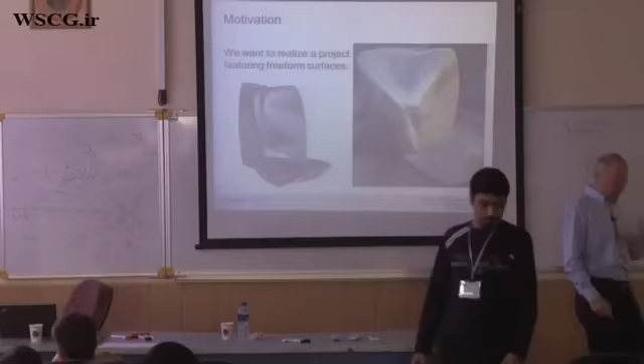So paneling, this is what the problem is. Given is a design surface, even a very complicated one maybe, and we would like to break it up into panels and see whether we can use as simple as possible panels while still not deviating far from the original design intent.

So this is a problem which is not completely solved. The solution which I tell you today is probably still the state of the art. Also, it was done in 2010, so it's a bit old.

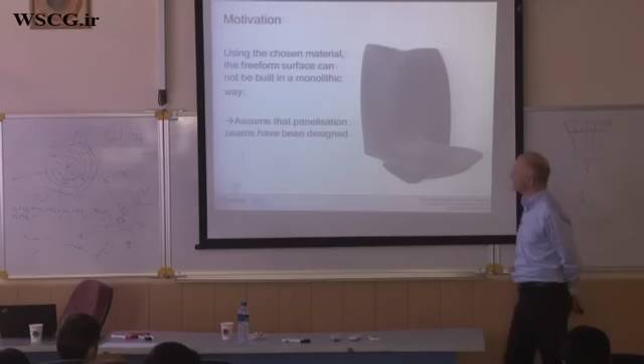What we did at that time: you do a layout of these panel seams by any software you like. So this is, for example, you can put some quad mesh. Here we assume this is the case, and there is software which pulls out such quad meshes. Of course, the quads will not be planar originally. It will be very hard to make them planar, maybe.

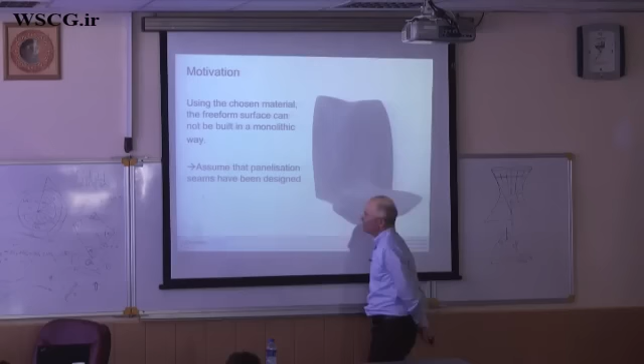And moreover, as you have seen in this project on the Eiffel Tower, the architects sometimes don't like only flat panels. Also, this is a mathematically interesting thing. It may look too faceted, so you will have to go to other panels as well.

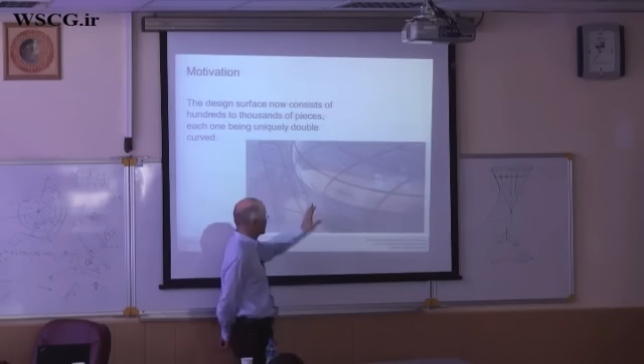So we assume here that we have a design surface and the panelization seams, so these panels are more or less determined, predetermined. But of course we must allow some deviation so that the entire thing can be built at a reasonable cost. Because if we just take the seams and the surface patches of the design surface, then it will be impossible to afford the building, simply because the manufacturing of such a panel may be too expensive.

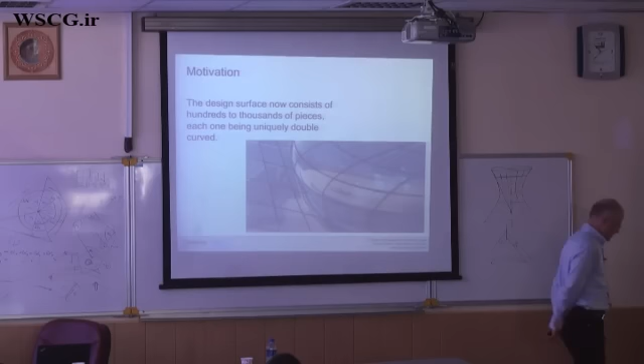In general, it will be, as we say, double curved, so not developable and curved in both directions, both principal curvatures not zero. This will, in most cases, require making a mold, and making a mold is typically more expensive than the actual production of the panel using this mold.

So this is out of the game somehow, you cannot do it. So what can we do? Now, the main idea of the solution is the following: I give several types of panels.

The cheapest are, of course, the planes. Then we prescribe other panels that are maybe cheap to produce, for example a cylinder. Remember, I told you for glass, a cylinder is still a reasonable shape. There are machines to produce curved glass in the shape of a cylinder.

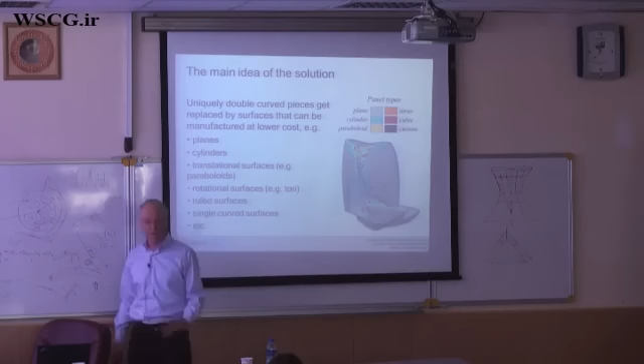Then we have a paraboloid. A paraboloid usually has congruent profiles on it, so it's a little simpler maybe to build a mold. And a hyperbolic paraboloid is even ruled.

I think it depends on the type of material you are going to use, which panel types one will actually put into the system. The system itself, the algorithm, could work with various types of panels.

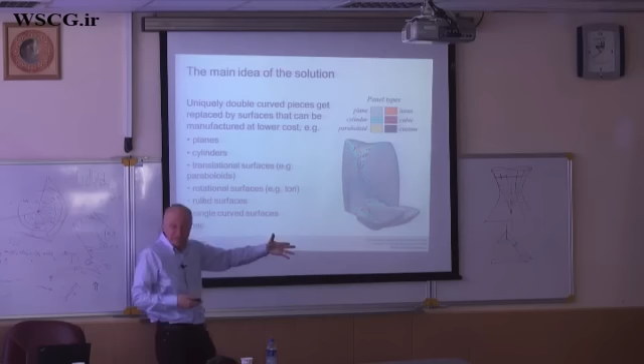So here I have the following types: plane, and you see on this design surface, in these relatively flat areas, you get a lot of flat panels. Then there are some cylindrical panels, and you see here in these more feature-like areas, you have these cylindrical panels. Feature, I mean areas where you have in one direction close to zero principal curvature, in the other direction higher principal curvature, and it's natural to use cylinders here.

And then you have some nasty cases, and the most nasty case is actually the cubic. The cubic just means you have like a cubic Bezier patch or so, a more complicated patch which definitely would require making a mold. But if these cubic patches are rare, it is still feasible.

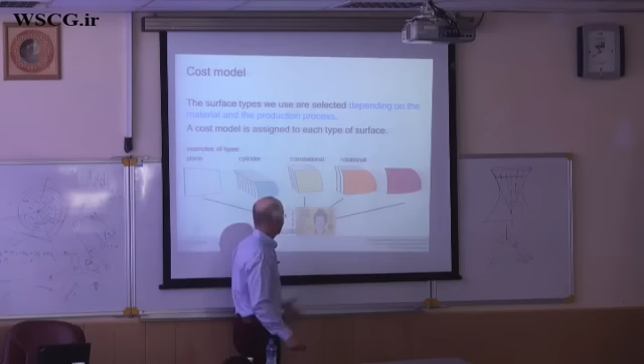Example types, as I said: the plane, the cylinder, maybe translational, rotational, depends. And of course, a cost is always attached to each panel. So this can go into the system.

And now one can do the following: one can come up with an algorithm. This has been published at SIGGRAPH 2010, and the lead author is Michael Eigensatz. Maybe I write this down. Eigensatz. This was published at SIGGRAPH, with other authors including myself and others.

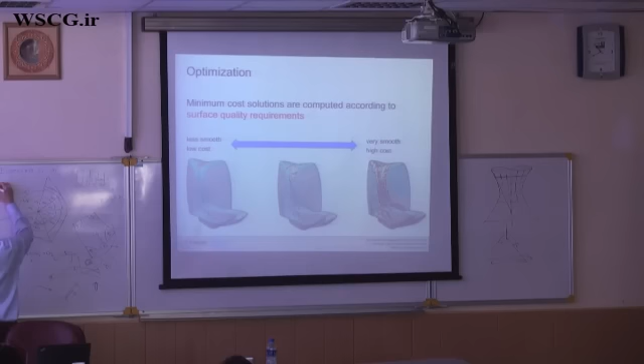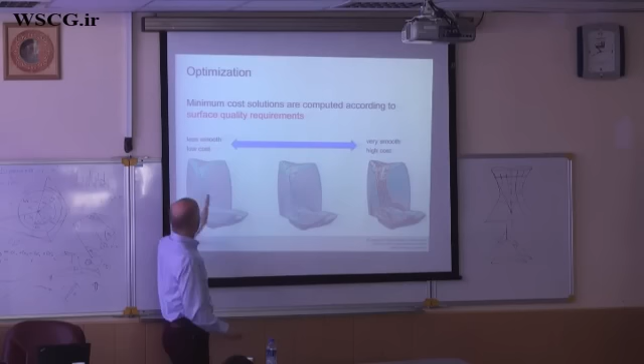SIGGRAPH 2010. And there we have an optimization, an algorithm that allows you to switch between a less smooth realization, say with stronger kink angles but a low cost, and a very smooth one, which has of course higher cost. It is clear that the higher quality has higher cost, so this is obvious.

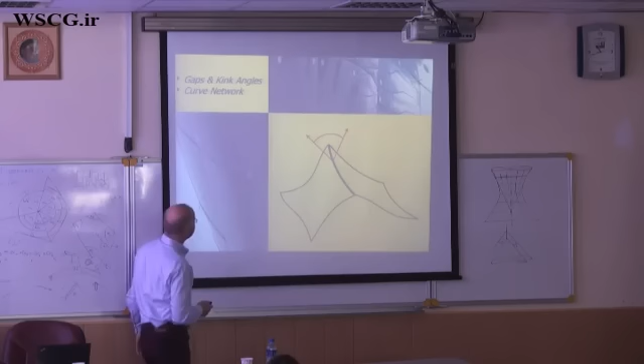Gaps and kink angles. Gap means the offset along the edges where they should join, and kink means the deviation in the surface normals. Here, this is the kink, and the gap would be here between these two patches.

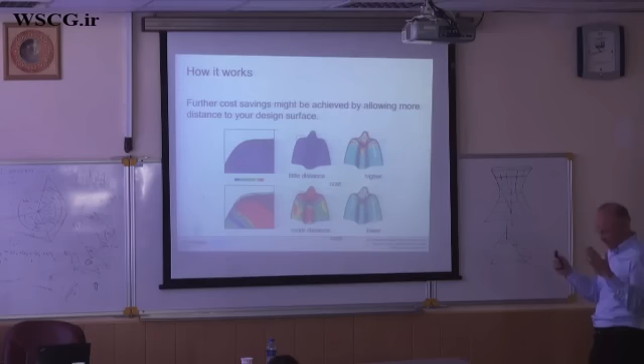Now, we even included the following: it may be beneficial if one can deviate a bit from the design surface. So we will not necessarily stick with the given design surface, we would allow some deviation. You may have a tolerance, say 30 centimeters, for a large building may not be much, but still it may help you quite a bit. And then, this is more interesting, we were thinking here about mold reuse.

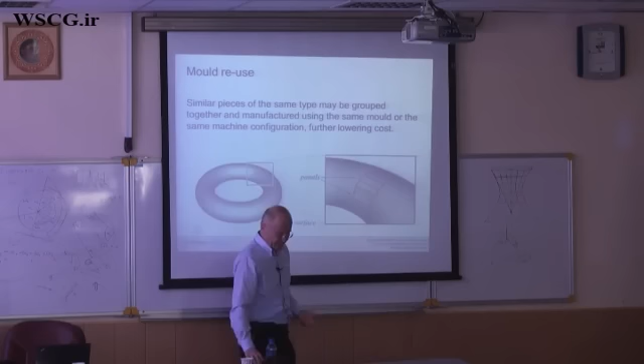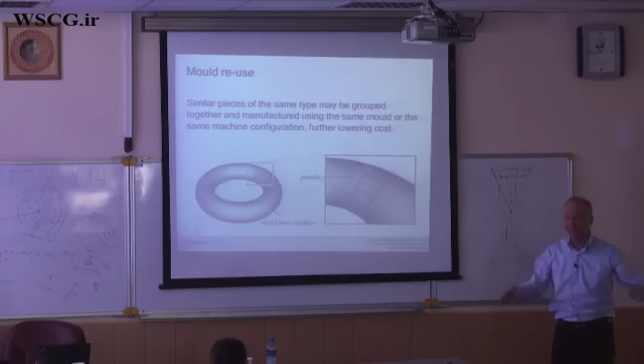This means the following: I have a mold, let's assume I have to produce a torus patch, a rotational torus patch, and I produce a mold to manufacture this patch. I may produce different patches with the same mold, just putting some material in a different way onto the mold, like glass—you heat it up, put it onto the mold—or cut the boundary out in a different way, like here. So with the same mold you may reuse it for different panels, and this mold reuse was incorporated in this optimization.

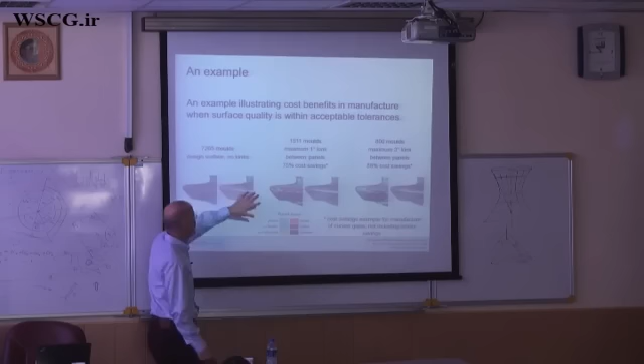And here we have 1,311 molds and a 1 degree kink. At 2 degree kink, you go down to 400 molds, and so on. So here you already have 88% cost saving compared to here. So it's infeasible, and the more kinks you allow, the more feasible it gets.

I will probably not tell you the details of this algorithm, because this is an entire lecture in itself, and then I cannot talk about the other optimization.

Please note... what did I want to say? I forgot it. See, I start to become really tired.

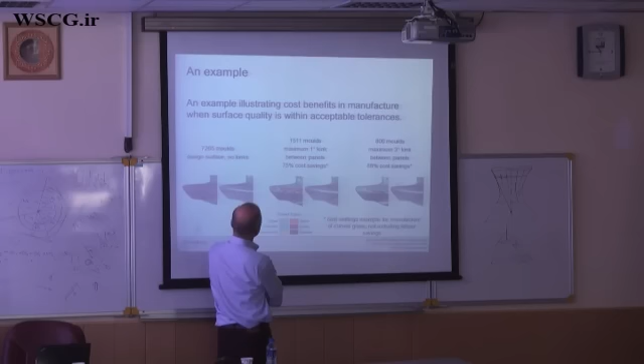Anyway, let us look at the result. So we have the original CAD model, we have this panelization by an architect, and then—this is what I wanted to say—it's global. It is not enough to do it locally; you have these seams which roughly define the location of a patch. Then I could do, say, the best approximation by a cylinder, because I like a cylindrical patch. But this is not what we are doing—we put it into a global optimization, and the patch type is also unknown.

And this is why it's a nasty problem: we have, say, 5 or 6 patch types, a discrete variable from 1 to 5, and we need to select from this discrete variable. Then we have continuous variables which define the actual location of a plane, the parameters of a cylinder, and so on. So this is an optimization problem which is discrete in some variables and continuous in others, and this is always painful.

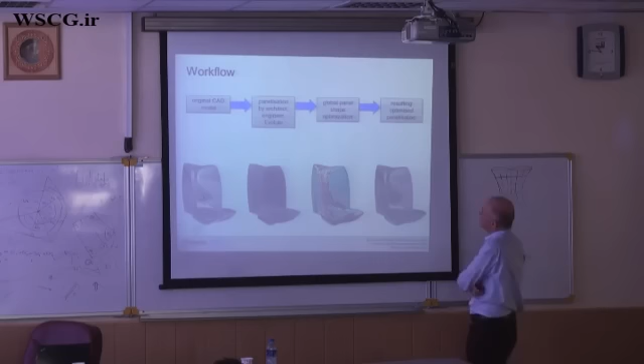So it is, of course, not possible to come up with a precise solution—you can only have some heuristics. One can actually prove that you need heuristics, and we apply certain heuristics in this global shape optimization, and then you have a final result. What I can really demonstrate here are some real projects, but this software is just for demonstrating the effectivity—it has not been applied to these projects to my knowledge.

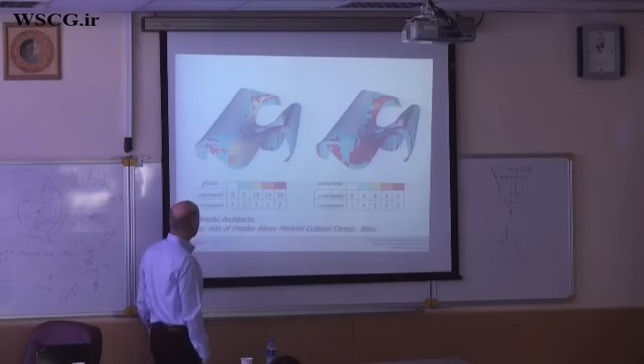If we do this design from glass, we have to assign certain reasonable cost values. So the optimization also takes into account the cost of production, of the mold and of the panel, and overall you would like to come down with the cost, which has to be reasonably estimated. So here, if you build it by glass, you see the values, and from concrete you see other values of cost assignment. Unfortunately I do not see here how much we save, but you can read it in this paper.

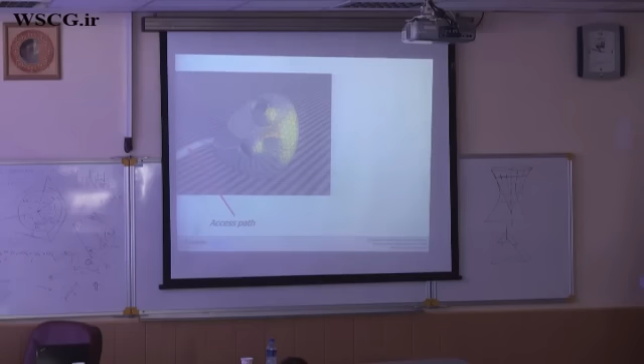This is a figure which is unfortunately not complete here. You can also do the following - this was a follow-up work, and I think it makes sense. If you have a huge building, there will be parts of this skin which you will hardly see from any viewpoint, because either it is very far away, or it is hidden by another building. So you could also take this visibility into account and allow a lower quality in the areas which are hardly visible, and this brings down the cost as well.

So here, this is the building, and people usually go on these parts, and on the other side, which nobody will see or rarely will see, you have much higher kink angles. This shows the kink angles, not the cost. So the quality here is higher because this is more visible, and the quality here is lower. This can also be done in this algorithm.

Now I go to what I really promised for this part of the lecture, namely the optimization. So this is an optimization method which we call guided projection onto constraint variety. Sounds very bad for the architects, but it is not so bad.

Usually one has to ask certain questions when you design something - not only is it nice, but also does it work? Would it stand in architecture? And how to produce it? And of course the architects know this famous guy Antoni Gaudi.

He came up with the idea to first come up with a physical model. Since building a model based on compression is not so easy, he turned it around and said, I design one based on tension. So he had these famous hanging models. And if you take this hanging model around, if it is force balanced with tensile forces in the first place, if I turn it around, it is in force balance with compressive forces after turning it around.

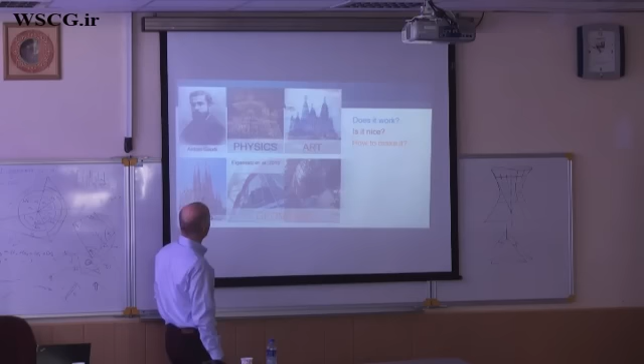So several parts come into play. I would say some small, simple version of physics, some kind of art is involved, and geometry. And what we would really like to do here is computational design, which takes these things into account, namely functionality, aesthetics, and whether we can actually manufacture it.

So this method of guided projection is to access these design spaces. It is called guided because we have to look at various types of aesthetics here. I will only talk maybe about the first part, about this form finding, and yesterday we had already developable surfaces so we don't need that today. Only if I have enough time, I can also show you something about these other types of regularity and patterns on surfaces.

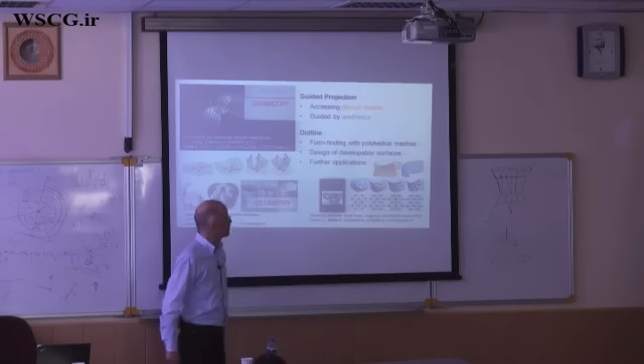I had this transparency already up. We look first, but it's only for motivation, at self-supporting structures. And mathematically, how do we express it? Let me repeat - I had it in my first lecture. A structure is self-supporting if I can put a network of forces inside, a mesh of forces inside the hull. So it must be within these bricks in the previous case.

And along each edge you have acting forces - they have to be compressive. So this is an edge vector, Eij is the vector from vertex Vi to vertex Vj. And this Wij is the force density, so this is the force acting in an edge.

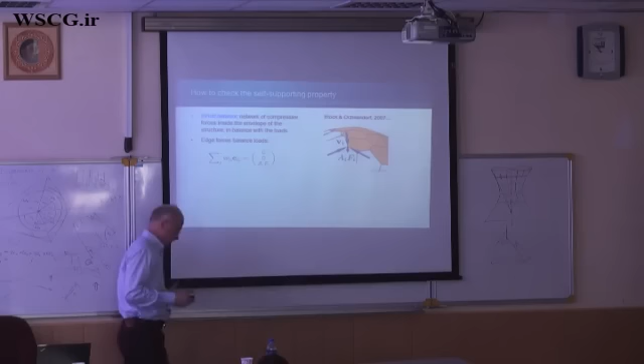And along each vertex Vi, all incoming edges have to balance the weight, which is usually vertical, because we only consider here the self-weight. I'm often asked, so if you only consider the self-weight, what happens if you put a little more weight on the structure? If there is some snowfall in my country or some sandstorm here, something like this.

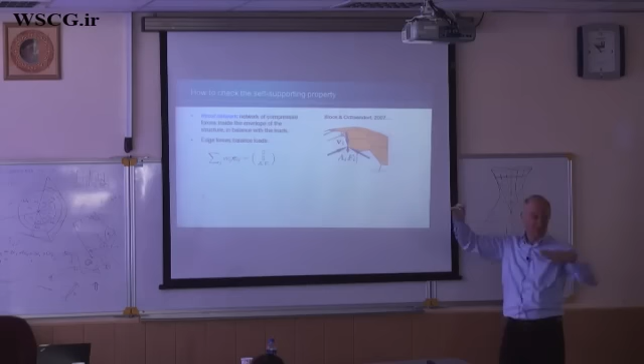What happens? It does not mean that the structure would fall down, because if you have inside your structure such a so-called thrust network, which is in balance with the dominating load, namely the self-weight, you can still put on material and would still find a thrust network that verifies that this structure stands, but up to a certain limit.

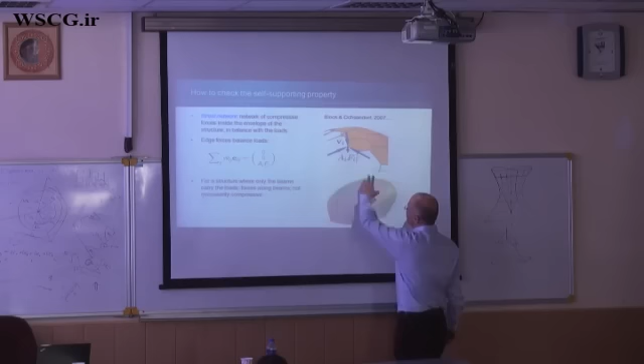When this load gets too big, there will be no thrust network inside the hull, and it will fall down. Of course, if we place these forces in a general masonry structure like I had before, these edges just need to be inside the masonry. There is no preferred direction.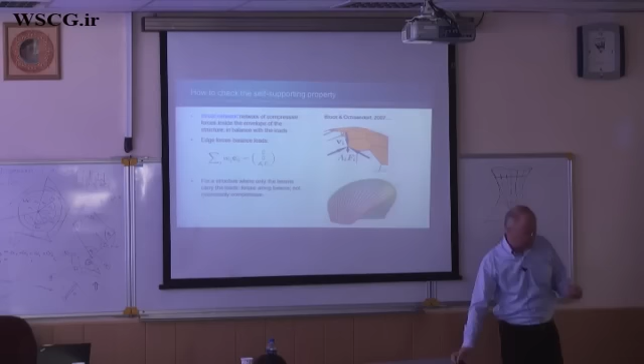If we have a steel glass structure and we do not want any forces in the glass, we must have our thrust network within the steel beams, obviously. So then we are more restricted. On the other hand, we can still work with this force equilibrium, but we do not really need only compression, because with steel you can also apply some tension, of course.

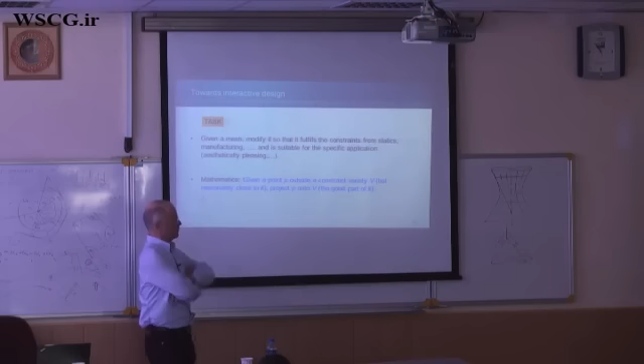So this is something which you can design with. I'll skip that. What we really want to do mathematically - I have given you in this series of talks many different constraints which were applied to these architectural structures.

One was the planarity of a face. We had this cone condition, the circular condition, and so on. On the previous slide, we had this force balance condition. So we had numerous conditions around.

These are constraints which limit the possible realizations. So mathematically, if we have an initial design which does not yet fulfill the constraints, then we have a point outside a so-called constraint variety - I will tell you in a moment what this means. We have to project our point onto the constraint variety, meaning our original design does not satisfy the constraints, and we have to find a design which is hopefully close to our original design and satisfies the constraints.

So we can think of it as follows. Let us just talk about meshes for a moment. Then the unknowns of a mesh are the locations of the vertices. Each vertex of this mesh has 3 coordinates. So if these are n vertices, we have 3n unknowns, right? This is clear. A mesh is then a point in a space R^d, where d equals 3n.

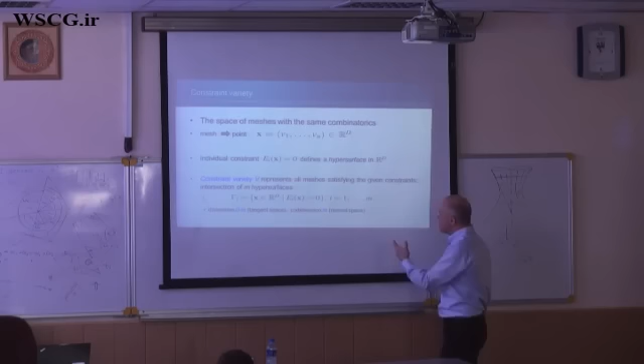In higher dimensions, one equation gives us something we call a hypersurface, of dimension d minus 1. And if we have m such constraints, the dimension of these points in this space R^d which satisfy all these constraints is a so-called variety, in general of dimension d minus m. There could be dependent constraints, and then it is not true - all kinds of nasty things can happen.

Also, one should note that when I write codimension, I mean the dimension of the normal space. This is not necessarily 1. But you see this already in 3D. Now let us discuss 3 dimensions.

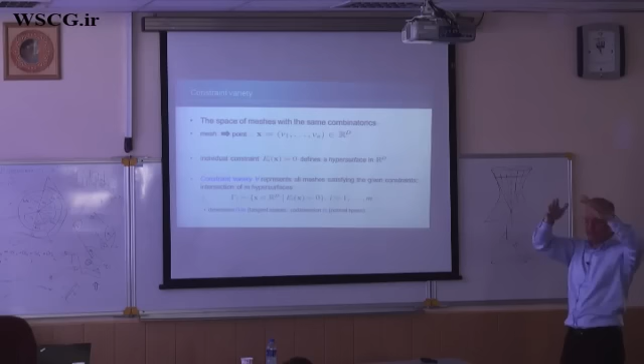If you have a curve in 3D, you need 2 equations to satisfy this curve. You can take one function f of x, y, z equals 0, and another function g of x, y, z equals 0. These are 2 surfaces, and the intersection is the curve. The curve does not have a unique normal at a point, it has an entire normal plane.

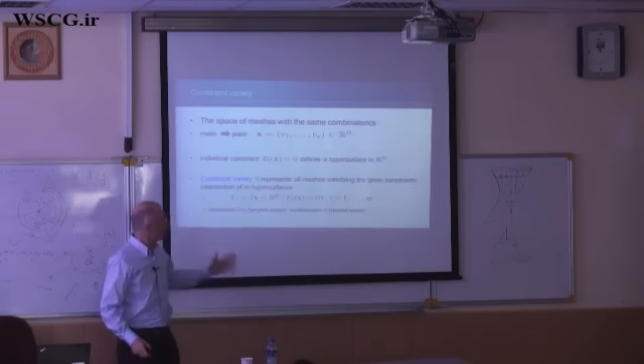In general, in a high-dimensional space, if we have m hypersurfaces, we get a d minus m dimensional tangent space of such a variety, and an m dimensional normal space. So this is a generalization. Now, this fast projection onto constraint varieties I roughly already indicated in my first lectures, and the key is that we introduce new variables.

If necessary, if a constraint is already nice, we don't have to change it, but otherwise we should introduce new variables so that the constraints are at most quadratic. This means linear or quadratic - these are the good constraints. And then we need to see how we...

...solve this whole thing, and this we'll do later. So, a reminder, this I had already on the board.

Planarity of a face, it needs not be a quad. Here it is a quad with vertices v1, 2, 3, and 4. Planarity means that the edges are orthogonal to a normal n, which is an unknown. So here we introduce the normal as an unknown, and just write that the edges are orthogonal to the normal. Whether it's a quad or a hexagon, we don't care.

For a hexagon, we do the same. We just have more equations, more constraints. Hey, and another thing which is important: in some numerical optimization techniques subject to constraints, it is bad...

...if you have constraints which are dependent. But here it does not matter. For the quad, if we just require that 3 edges are orthogonal to this normal, right angle with the normal, the 4th edge, of course, automatically is orthogonal. However, we do not want to leave out this one constraint for various reasons.

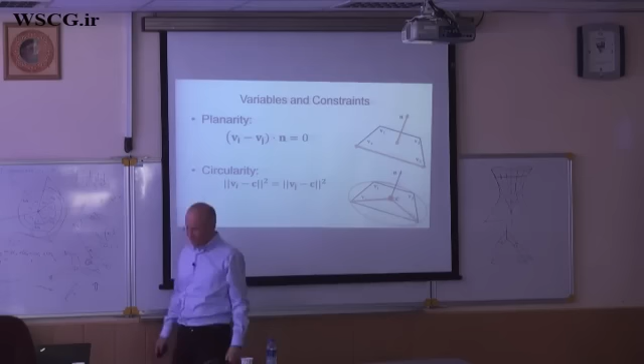It's much better to introduce the center of the circle as an additional unknown and just require equal distances of this vertex to the center, which is quadratic. You can simplify, of course, but I don't want to do it now. This is an important thing.

We need to be close to the reference surface. So during our optimization, what will we do? We will have an initial design, and then we will change our design so that we satisfy the constraints. But we assume in many cases that we have a given design surface - the architect has provided a design surface, and the mathematician has to compute the rationalization. So we have to stay close to the design surface. And this is done as follows.

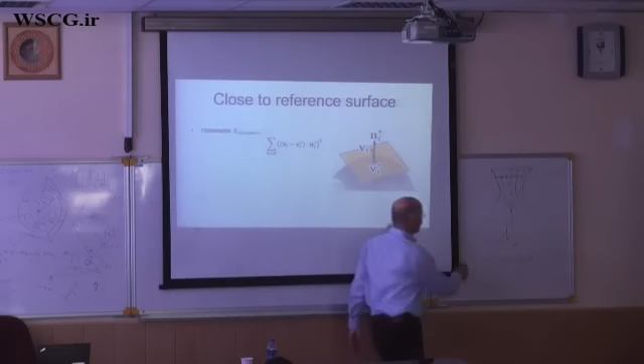Assume that we have our current location of the vertex VI, somewhere - let me draw it here too - we compute the closest point. During this iteration of the algorithm, we will have a vertex originally in this position, and during the optimization it will change. Typically the changes will get smaller and smaller, and then at some point we will have converged and reached a solution. So if we have the vertex VI in its current position, C means the current position, and we have here our reference surface, we compute the closest point, VI star, on the surface to this point VI.

So how do you do it? If you have a curve in the plane, and you have a point, where's the closest point? The closest point is clearly on a normal. But there may be other normals here.

But what you really need is a very good algorithm for computing the closest point, because this has to be computed many times. This is more or less a computational geometry problem - not really, but definitely a geometric data structure problem - because you will have to find a good data structure, like a KD tree or something like this, which allows you to quickly compute this closest point.

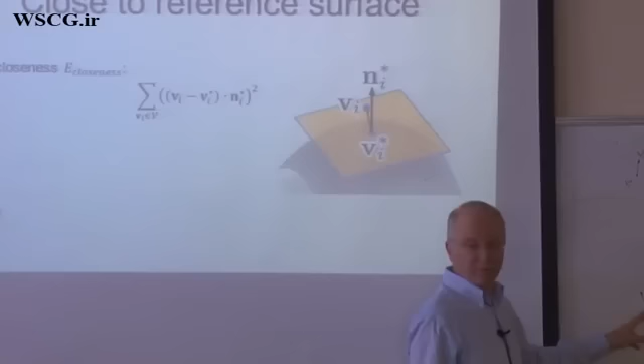Typically, you will benefit from the fact that during this optimization, these points will not make big changes, and then computing the next closest point is even simpler, because you can use this as a starting guess for some kind of Newton iteration, which is very fast. So this closest point computation really is a bottleneck in the speed - most algorithms which have this closest point computation, this is a bottleneck in the time.

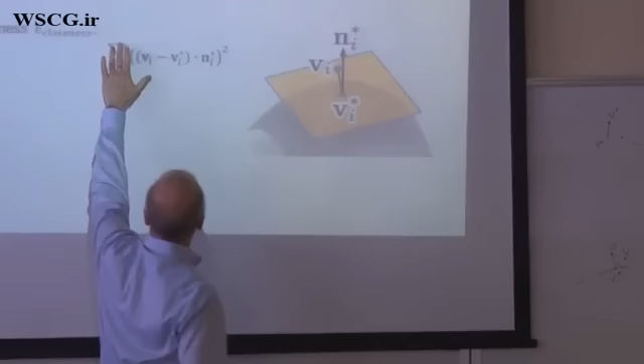So to Vi, to the current point Vi, we compute the closest point VI star. Here we have a tangent plane in 3D if it is a surface. And then we make sure that the new location of VI is close to this tangent plane. So what do we do? We just say the new point VI minus VI star, times Ni star, ideally should be 0. So this is a constraint - one should write Vi minus Vi star times Ni star equals 0. The Ni star is known.

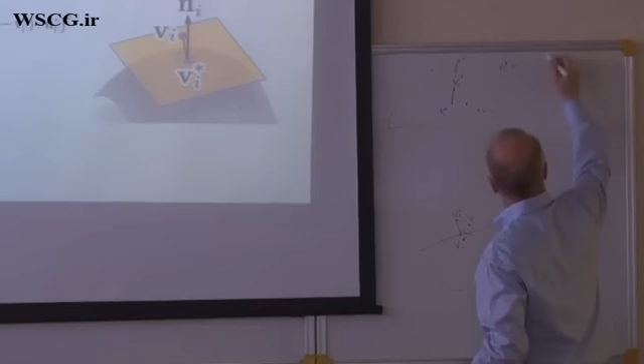Why is it known? Well, because we make this closest point projection. So this is actually in this direction. We have Ni star, which must be the vector Vi current minus Vi star, normalized, divided by the norm of Vi current minus Vi star. So this is the normal—the closest distance occurs at the normal. This is known, but in the next iteration, this is the new position of the vertex.

It just says that in the new iteration we want to have this point Vi in this tangent plane. It may appear to you as not good. You may think it is much better to keep this point as close as possible to this closest point. And I see many publications which use it, but I think it is bad for the following reason.

I would have more mathematical explanation, but intuitively it is bad for the following reason. If you have a design surface and you would like to achieve a design location of vertices which stay close to the design surface, you must allow your vertices to move along the surface. And if you always make your points close to the closest previous point, you somehow stick to the surface too much. This tangent plane allows you the gliding.

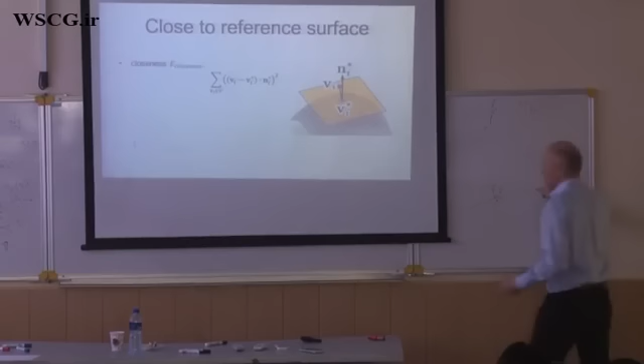This, I think, is quite obvious, because here we could even go far away. This will be punished by another term, but we can really allow the gliding. So please note, if you implement something, make sure that this closest point is not used directly, but the tangent plane is used. Now I explain force balance.

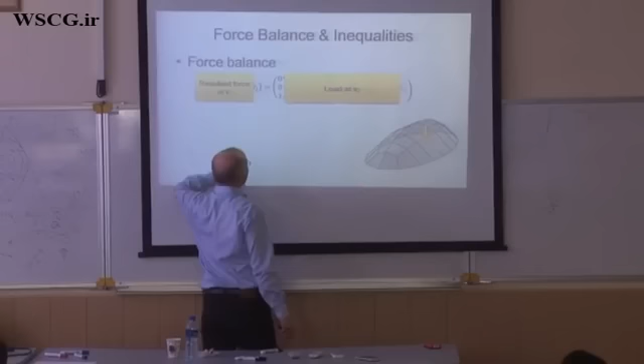How would we express this? The resultant force at the vertex equals basically the sum—it's the load. And the load can come from adjacent beams or from neighboring faces. In order to determine the weight, here we need the length of a beam, and here for the face we need the area of a face. But both the length of a beam and the area of a face can be computed with quadratic expressions.

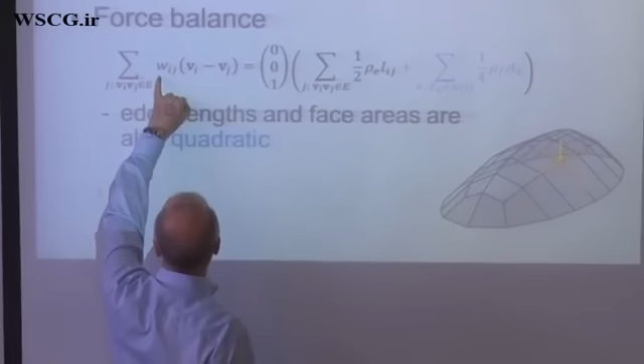So we are also here within quadratic expressions, and the left-hand side is beautiful anyway because we have these unknown force densities times this vector, so it's bilinear. And here we have a constraint—this is also just a product, and these are new variables. Rho A, the densities, is even given, and the length is expressed in a quadratic constraint.

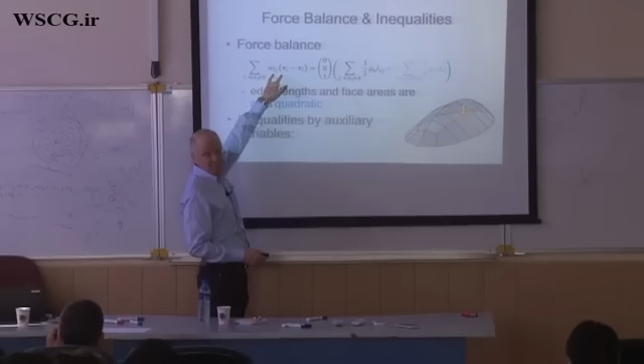So really we have only quadratic equations so far, but now we get a linear inequality as well, because for self-supporting we would have to write that this Wij is positive, non-negative. And this is simple: we just introduce another new variable, Uij, and we say this omega Wij is the square of Uij. So everything has quadratic or linear constraints.

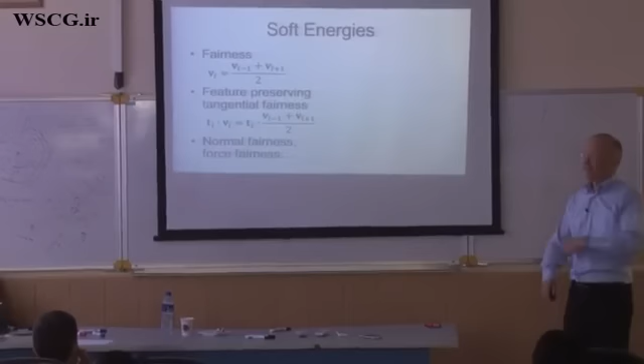This is not enough. If you do just what I said so far, you will get very bad meshes—it will look terrible. But there is something else we need to consider. If we have a mesh, we may want selected mesh polylines, like this one here, to resemble the shape of a smooth curve. One simple way to achieve this is to require...

...that a vertex is close to the midpoint of the two neighboring vertices. So the midpoint of the two neighboring vertices here is Vi minus 1 plus Vi plus 1, divided by 2. This would be the midpoint, and this Vi we want to have close to it.

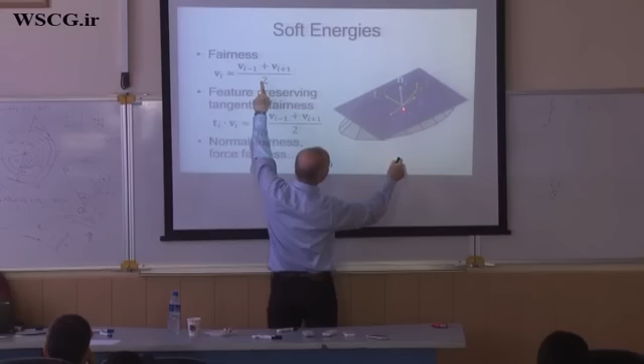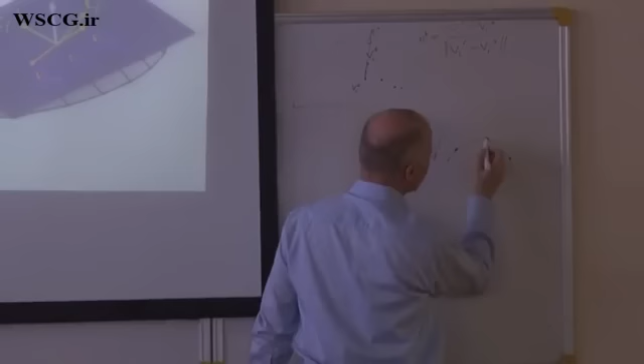However, this is not so nice since we are given a design surface. And if we have to go in a direction where my design surface has high curvature, think of this: if you have here a high curvature, just as in the curve case, it is clear it will not be possible to bring this point close to the midpoint here. So this expression, this fairness term, somehow tries to avoid high curvature, which is not always feasible.

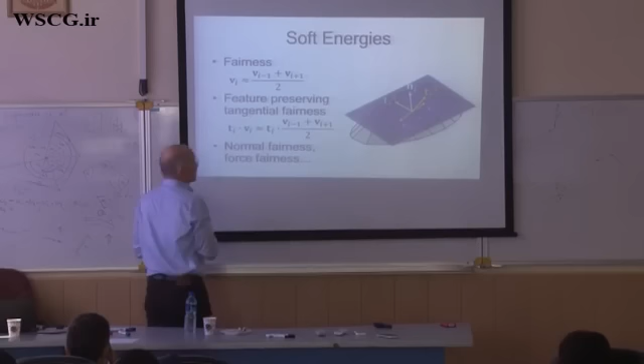So we do something different. Yesterday we talked about normal curvature and geodesic curvature. We would like not to have unnecessarily high geodesic curvature, but the normal curvature is given by our design surface and we shouldn't touch it. So what we really make small here are these tangential components of this difference vector. Without going into more detail, I just tell you this. And then we have an algorithm.

For the following, we have these constraints, now in a different notation. X is a collection of all variables, so this is high dimensional, including the auxiliary variables—everything is in this X. Every constraint is at most quadratic, so it's of this form. Of course the architects don't like it: X transpose times matrix times X is a quadratic term, here's a linear term, and here the constant.

And we do a linearization. Taylor expansion means this expression taken at my current position of variables, plus gradient times x minus the current position, and the higher order terms go away. So this is linearization, and this is a linear equation now. So we have linear constraints.

However, we cannot solve this system of linear equations directly, for various reasons. There are two main reasons this is not possible. The first is this will be a design problem, so even if you try to solve this linear system, you should have infinitely many solutions—because this constraint variety is not just a point, it's a higher dimensional manifold. So it will be underdetermined.

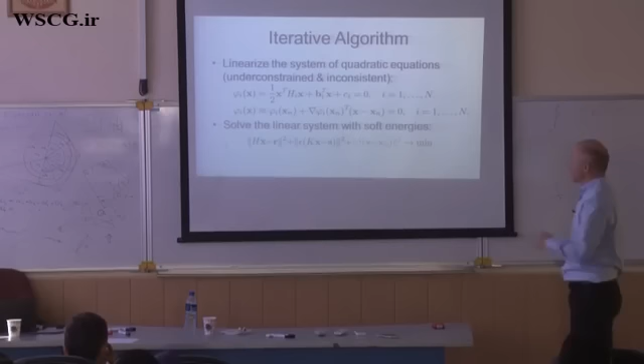But even worse, there will be maybe conflicting equations, because for the planarity of a face, we use all orthogonalities—each edge orthogonal to a normal—and we get redundant constraints, and definitely through some numerical imprecision, which is always around, these are theoretically conflicting equations. So this is bad. So what we need to do is solve this system in a least squares sense.

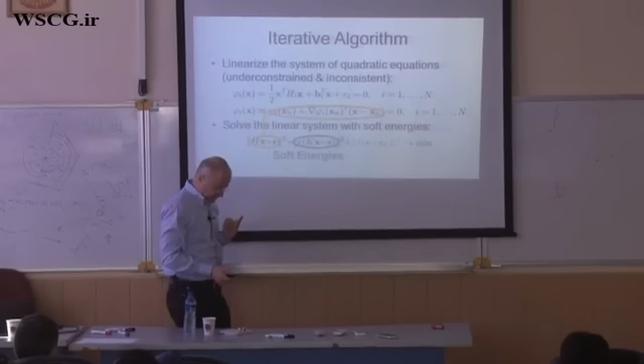We make this residual, left-hand side minus right-hand side squared, as small as possible. But we add to this equation, these constraints, something with a certain weight, epsilon, that comes from the aesthetics, the polyline fairness. This was also of this form.

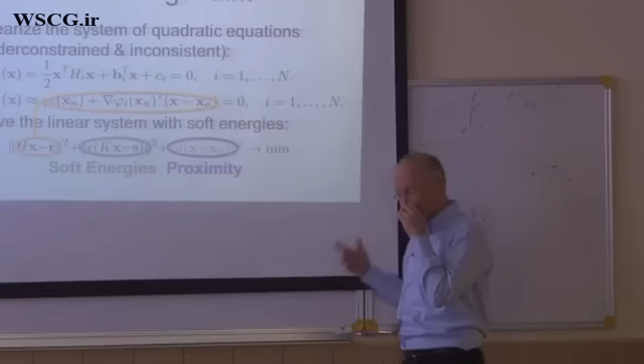And then we have a third term, depicted here: we have a vertex in a certain position, the next, and so on. We don't want these vertices to move too fast—like here, this is bad. They should gradually move, because in interactive design this is important. So we take a third term that says, don't deviate too much from your previous solution.

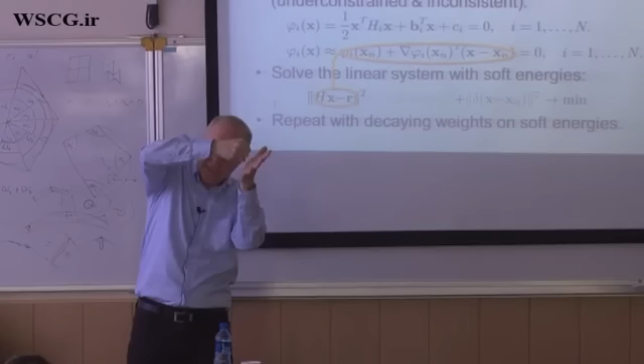This we repeat with decaying weights on this soft energy. Basically, the mathematical viewpoint is this: we have a constraint variety and a point outside. Initially we use this fairness quite a bit to get to the good region of the constraint variety, but once we're in the good region, we don't care about aesthetics anymore, because everything in this region will be aesthetic. Then we want to make sure our constraints are satisfied to high accuracy, so the weight of this part goes away—only this is kept, because we need some regularization.

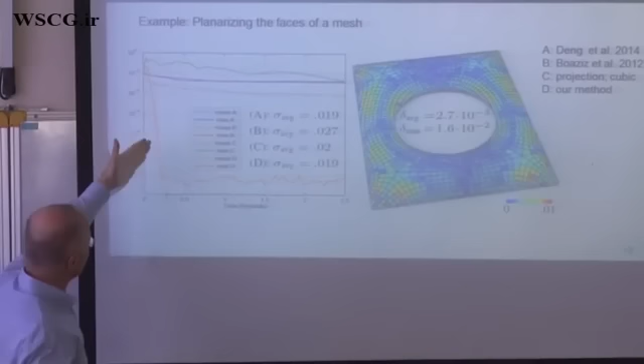This, I think I have shown you—it's an interesting observation. After a few steps, this error goes down quickly, and then you already reach numerical accuracy. You can compare with other methods that do not use these quadratic constraints. It's an observation in all of my programs written with this approach, that this quadratic formulation is really good.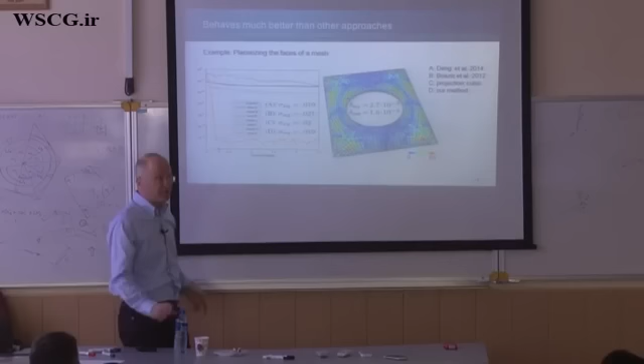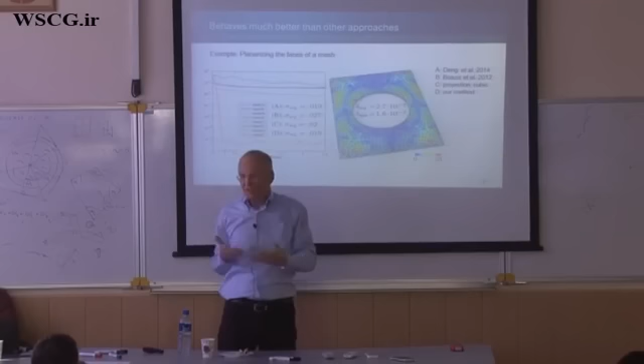This is an open problem for clever mathematicians: why is this quadratic formulation so good? I do not know it, I just have a feeling—a plausibility explanation. If I linearize a quadratic constraint, I throw away the quadratic terms. If I linearize a cubic equation, I throw away much more information. If I linearize something even more nonlinear, I throw away more information. This is not a strong argument, I know, but I would really be happy if you come up with a good explanation of this phenomenon.

I don't have it, so here are some results—I think we have seen this before. These are designs made, for example, by planar quads, and they are in force equilibrium. This is interesting: it's also self-supporting, and it is not a height field, so it has quite complicated topology. It's interesting that you can build such a thing—self-supporting, not just the standard cupola or cylindrical or dome-like shape, but much more complicated. Here is the ground, so above the ground you hit the shell several times. It's interesting that it can stand just by compression.

The video I have actually shown you—I think it's not necessary to show again. No, you have seen it. So I think it works.

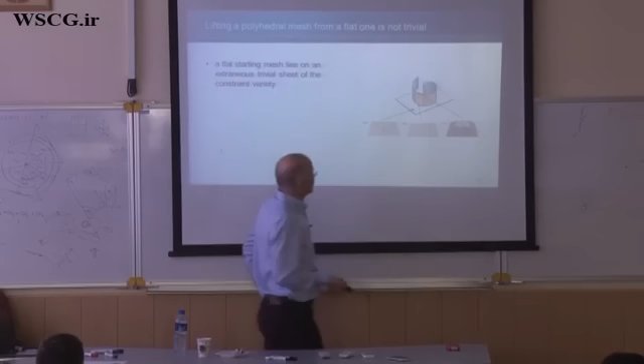Mathematically, one would think if we have a flat mesh, completely flat, and we are looking for a planar quad mesh, why don't we just start with a flat mesh? This should be a nice point on my constraint variety, and then I do some iteration to get another mesh.

The reality is not so nice, because if we think of all polyhedral meshes of a given combinatorics, say planar quad meshes with a fixed combinatorics, then this constraint variety is composed of a linear space which belongs to the flat meshes, where all vertices lie in a plane. Same combinatorics, you have different realizations as a flat mesh. I call this the trivial part. And then there is this interesting part, which is actually of the type I like, because I want something curved.

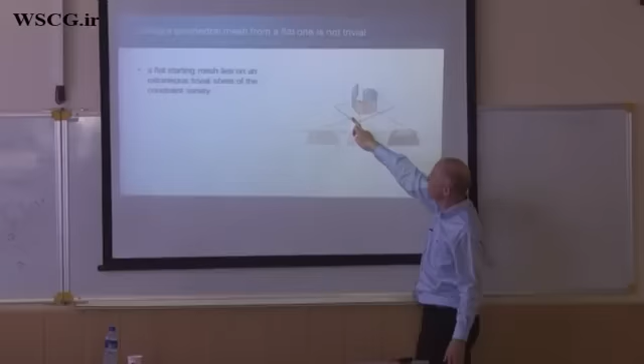There is an intersection between this trivial part and the interesting part. If I start originally here, and I would just locally explore in the tangent space, I get nothing. I will always remain in this planar stuff. So I should give you an explanation of this part.

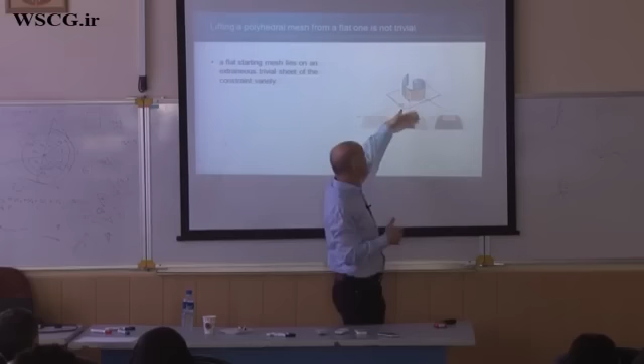In this case, there is a nice explanation. Such a flat mesh lies on the interesting part of this constraint variety if and only if you can find forces in the edges of this mesh which balance the mesh, so that it is in force equilibrium. So it's interesting that here in the good part, you already have this force equilibrium around.

For actual manipulation with our system, it doesn't make so much of a problem, because you have seen this video. This guy pushes up a vertex, immediately removes it from the flat state, and somehow it works really well.

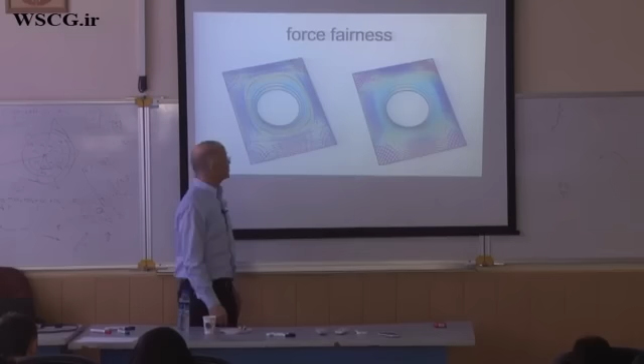Another interesting thing for the engineers is we can even think of force fairness. Force fairness, I mean the following: this color coding is here the magnitude of force, and we do not want abrupt changes of forces in the bars. So here these are abrupt changes. You see I have blue, red, blue, and green, so this is abrupt changes.

We can do a similar thing as we did for the aesthetics of polylines for the forces, force densities, so adjacent forces are more equal, like here, so this is not so abrupt. Of course, the singularities are always a little bit of a trouble, and it's interesting to see that here, even if we apply a physical constraint, namely fairness of forces, we get, in fact, a positive geometric impact. It's not getting worse at all. It's getting geometrically maybe even better.

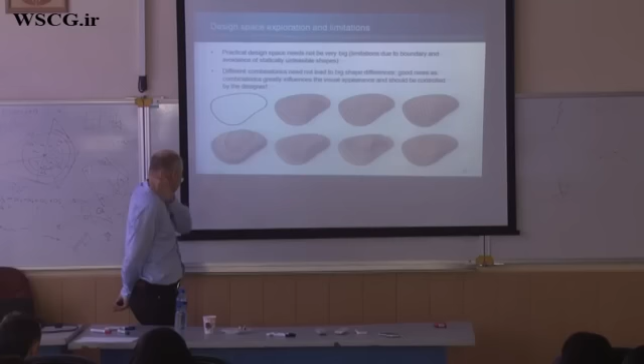Another thing: so far what I had shown you is cases where we have already prescribed the combinatorics of the mesh. Once again, combinatorics means how things are put together, so the valence of vertices, how many quads are around the vertex, and so on. We just move around the vertices, we change the geometry, but the combinatorics is fixed.

So we can run a test case. We give a boundary, and we put different quad meshes inside this boundary with different combinatorics. Then we do an optimization, say, for flat quads. And then it turns out that the useful shapes here, and these are probably only these three here, maybe these also, these four, look very similar. So somehow the combinatorics here has an influence, but fortunately it is not huge.

I say fortunately because sometimes, especially if this mesh is visible, if it's just beams and glass, for example, then the designer wants to have hands on this combinatorics. So it should not come out automatically.

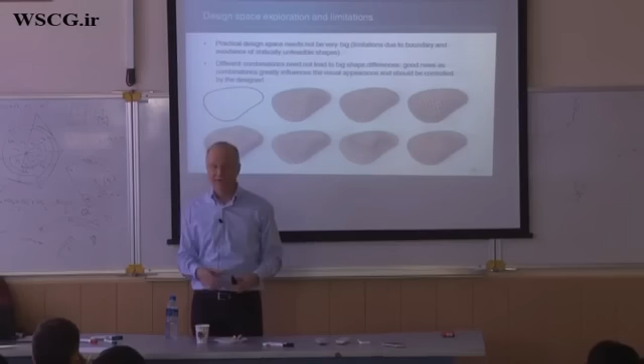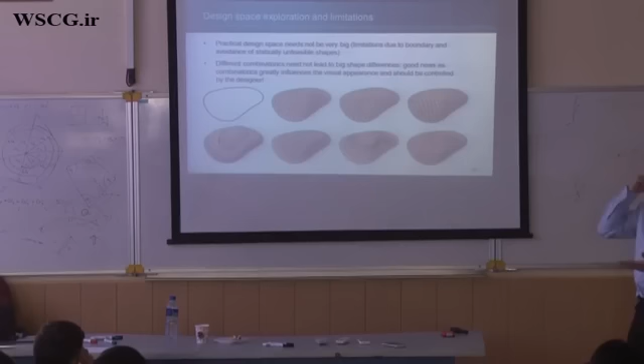It's also something I want to say to all of you: I do not want to remove the architect from the scene, of course. We need the architect. I do not claim that we compute an optimal design, by no means. We want to provide tools so that architects and engineers can come up with designs that both meet the constraints on physics and manufacturing and also meet the design intent of the architect. So this is what we want to do.

This is a video which shows something, but unfortunately it's not well seen. You can hardly see the edges, but the guy does some manipulation of the combinatorics. This is worthless, not nicely visible. We have done this yesterday already.

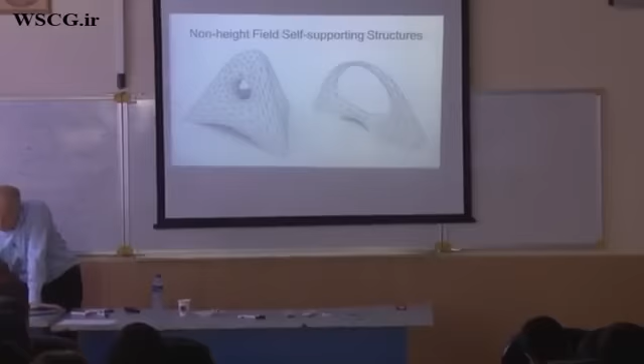No questions? Yeah? One of your slides showed a structure and said it's self-supporting. Why? Because we optimized it so that you have this thrust network inside. So the mesh you have seen... I think you mean this one maybe, huh? This one, yes. What you see here is a triangle mesh, and this triangle mesh is a thrust network.

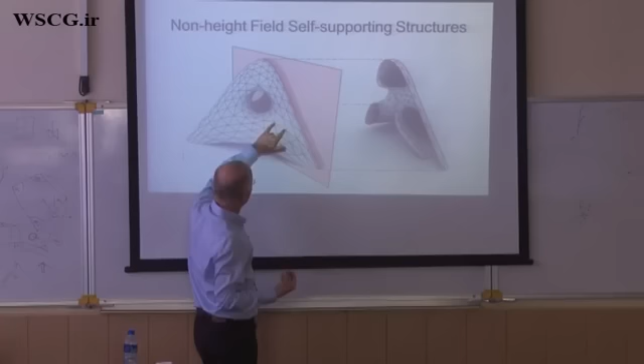It means you can assign forces in these edges of the mesh, which everywhere are in balance with the loads. The loads, of course, assume some kind of material. I don't know with which weight it was computed, but it's proportional to the area of such a face, the weight of a panel, and you have to distribute the entire mass into these vertices. The computation, using the same tool as in the video shown previously, gave this shape, and it is in force balance with compressive forces only, within the limits you'd like to apply for this type of material. Therefore it is self-supporting.

Building it is another thing, because how do you build it? You cannot just start brick by brick and build it up, especially without mortar. You need a scaffolding. You put your bricks, then you have to remove the scaffold, which will be more or less impossible with this type of shape. Only at the very end, when everything is complete, you remove the scaffolding, and then it will stand.

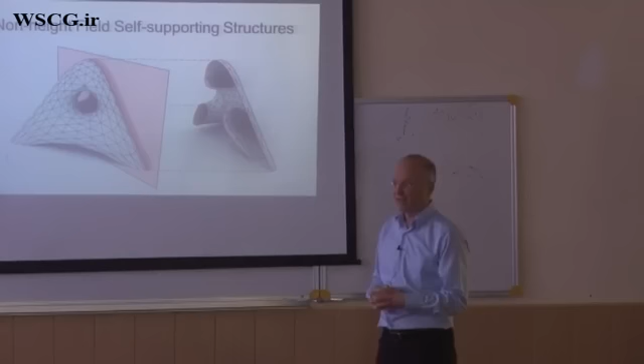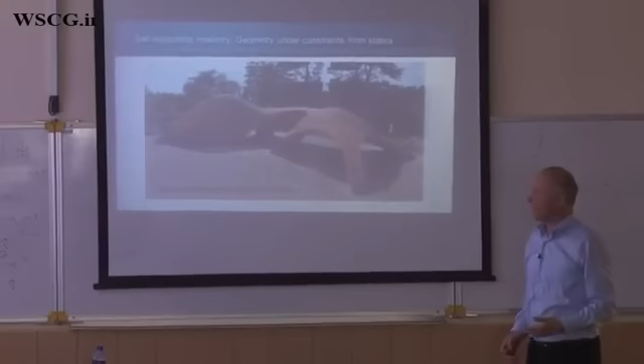This was also done for this design here, by Philippe Block. This is in front of a building in Zurich, at ETH Zurich in Switzerland. They had scaffolding, put up these bricks, and then removed the scaffolding, and you see it stands. If you look into this guy's web page, Philippe Block, ETH Zurich, he may still have videos there.

They had to destroy this structure because the administration of the university didn't like it in front of the building. They came with big hammers and tried to bring it down, and it is surprisingly stiff. They put a lot of weight on it, and it still stands. Only if you do severe damage, knowing where to hit it, will it fail. So if I had to bring down this structure, I wouldn't hit it here, I'd hit it here. If you manage to break it there, a large part will fall down, but not everything—maybe this part will still stand.